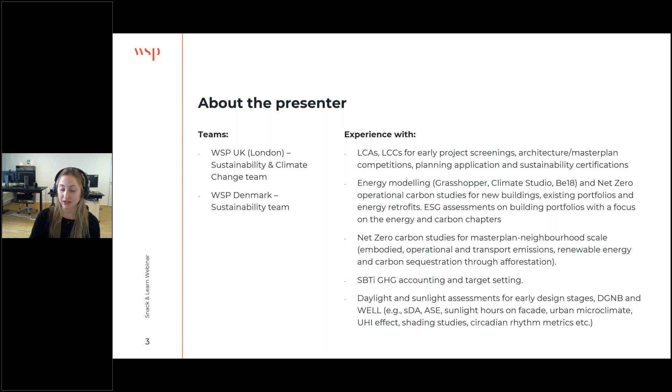Moving on to the project. Today, I will try to give you an overview of how we work to reduce the carbon footprint of a mixed-use building by more than 50%. The design for this building took place as an architecture competition entry for a new office and mixed-use building in Oslo, in Norway. And this happened in collaboration with Schmidt Hammer Lassen architects. As a design team, we reached only place number 2, but nevertheless, we learned a lot along the design process, and this is what we came to share with you today.

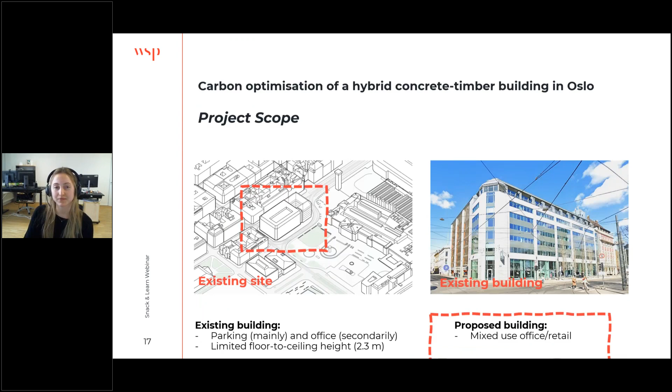So we will start with an overview of the design intentions and the sustainability targets, and then we will explain which design principles contributed the most to the project carbon reduction and go through them one by one, and then we will close with an overview of the final design proposals and lessons learned.

So the site, as you can see in this slide, is located in Norway, in Oslo, very close to the central train station. It currently comprises a parking building with some limited office areas on one side, on the front. The aim of the design is for the site to be redeveloped to an office building with also some large retail and some public areas, and also a small bus stop area on the ground floor. That was the brief. And the competition brief also includes demolishing the existing building and designing a new one in its place, because there is a very low floor-to-ceiling height on the existing parking building. It was about 2.3 meters. So it was not very appropriate for the character of the new design.

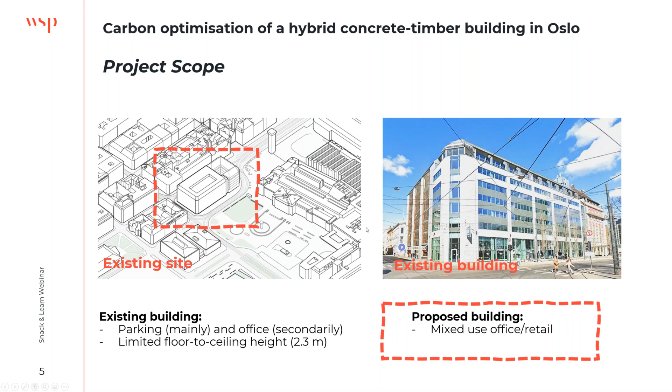The new office building is aspired to comply with the Norwegian FutureBuilt requirements. This is a sustainability scheme, and it generally requires new buildings to achieve very low whole life carbon emissions, incorporate at least 50% reused and reusable components, and achieve a significant increase in local biodiversity, among a few other criteria. When it comes to its carbon performance, the new buildings are aspired to perform 50% better than the current practice in the industry, while simultaneously looking 10 years ahead into the future.

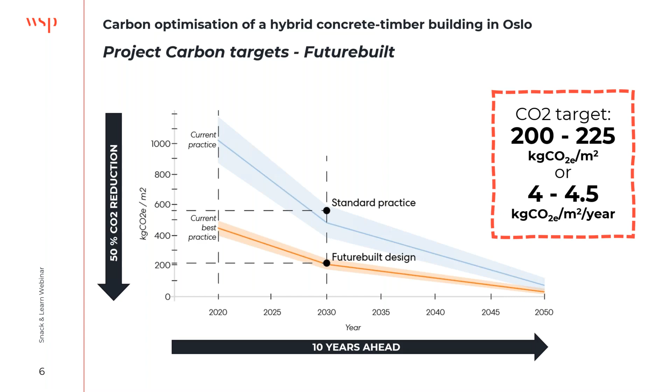And this means that the carbon target for our design was a bit less than 225 kilos of CO2 per square meter, or for the Danish audience today, the equivalent of less than 4.5 kilos of CO2 per square meter per year. This is the primary carbon metric in Denmark. In WSP, we always seek to align our designs and advice with sustainable development goals. And for this project, alignment was pursued with goal 3, good health and well-being, 9, industry innovation and infrastructure, and 12, responsible consumption and production.

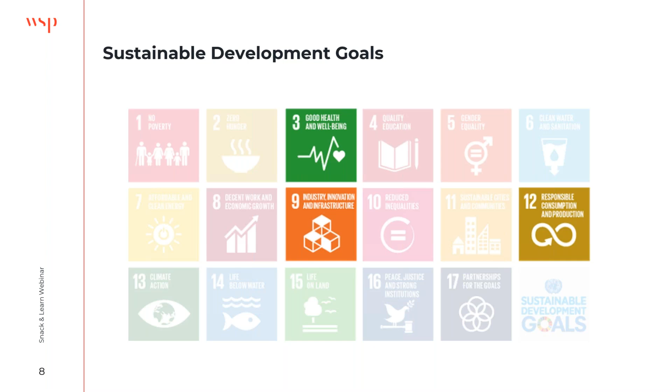So, in the early stages of the design process, we collaborated closely with the architects to understand, first of all, which are the broader design initiatives which have the largest potential to cut down on carbon for this project. The first possibility that we decided to explore was whether it is possible to reuse any of the precast concrete structural elements from the existing parking building before it becomes decommissioned. And these elements, we were thinking if we can use them for the construction of the new basement areas, which are required anyway by the competition brief. They were quite extensive and therefore potential carbon hotspots if we didn't include a solution for them.

And then moving on our considerations from the substructure to the superstructure, we look for ways to minimize, to reduce the required quantities of the structural materials. And that's why we decided to include some early computational design analysis on some different structural grid scenarios. We will go through them later.

And then we also explored various structural systems, concrete, timber, or hybrid. And we wanted to understand which of them could be efficient when it comes to resource use. The next design opportunity that we dived into was including timber in the structural and architectural design.

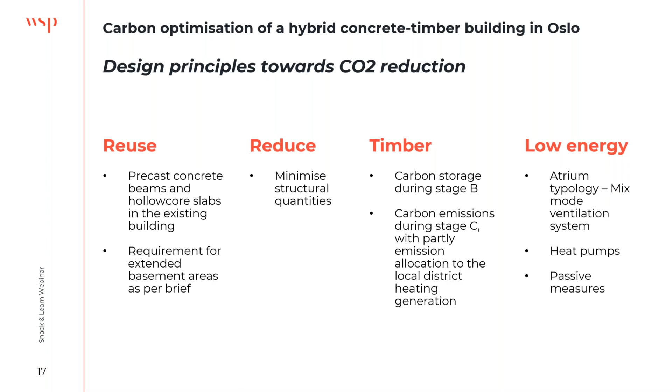Starting from the reuse. The existing multi-story parking garage, as we said, is constructed from long-span precast concrete elements, which provide the opportunity for reuse of the structural components, and they have been considered to be reused specifically as part of the proposed basement level floor structures.

Circularity of structural elements in this way is not very new, and there is a precedent in Oslo. There was this development, Kristian Augusts gate 13, which is Norway's first building where the reuse of building materials and circular solutions has been used on a larger scale. So by considering such a solution, it is estimated that we are saving approximately 90% of the embodied carbon in comparison to a standard construction of concrete floor slabs, not accounting for foundations or retaining walls, just the slabs.

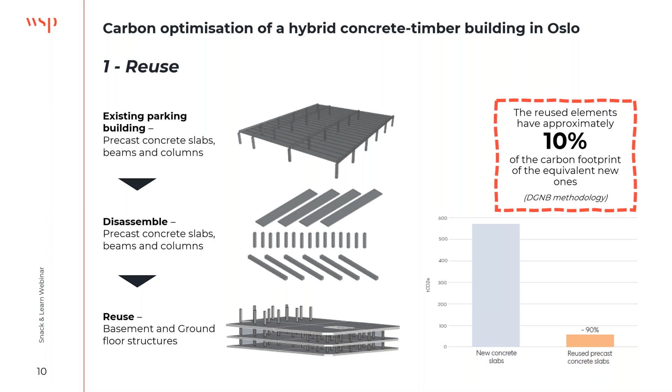And then the widest one was a 6 by 12 meter grid, with only 2 rows of columns, but the beams bridging the long span are timber. And the rest of the options that we tested lie in between. So the results of this analysis showed that for this building geometry, we were going for an atrium typology, so not an especially long building.

It is more efficient with the narrower and leaner grids, the 6 by 6 or something equivalent. And the long span hybrid timber solution, while providing the benefit of a clear open floor plate, would increase the embodied carbon content by approximately 20%.

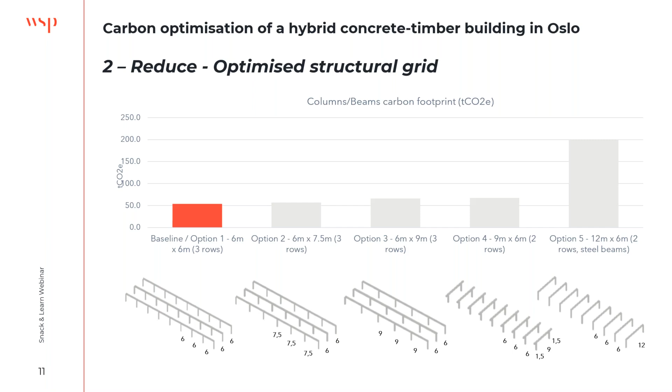And then as the design moved further and we specified the structure, we moved to another method to reduce the material quantity. And this was to adopt the modular CREE system. So this consists of hybrid timber and concrete floors, which are supported by steel beams here internally and timber posts along the facade. There's a concrete topping to the timber floors, which provides additional mass and improves the acoustic and fire performance between the floors.

The proposed arrangement is based on a 7.5 to 7.2 grid, and then this is divided by 3. And yeah, so this suits the proposed 2.5 planning grids and still offers a pretty flexible open plan arrangement. The proposed system was selected also because of its carbon and structural efficiency, but also because it responded to this high quality design intent with crafted detailing of all of the exposed details.

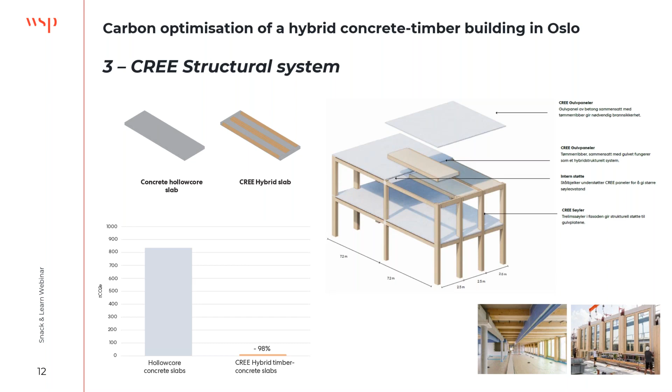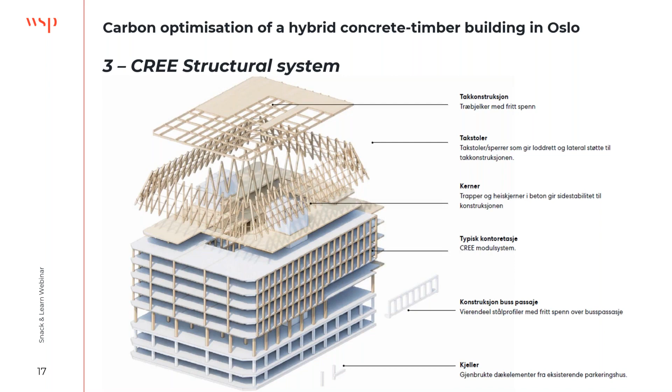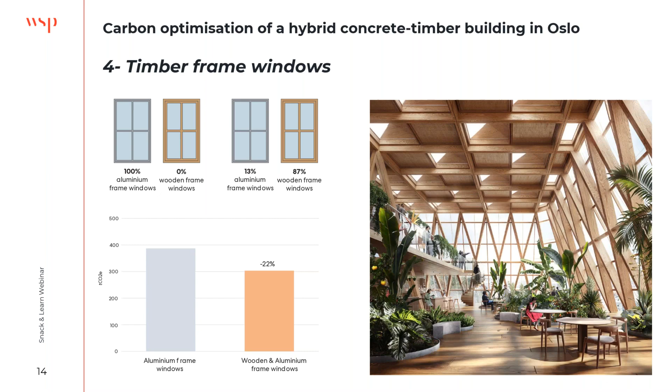And finally, the last layer of the proposed low carbon building design aims to achieve a low energy performance. The proposed passive design measures include using the thermal mass provided by the concrete layer of the slabs, and this has been combined with a geothermal heat pump based system for heating, cooling, and ventilation. There is some heat recovery, which takes place during winter at the top of the atrium where the warm air naturally rises, and then during summer, as you can see on the right, the openable windows on the rooftop with integrated shading help to mitigate overheating naturally.

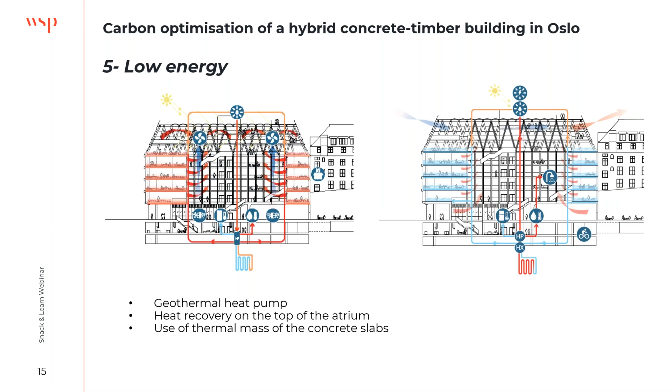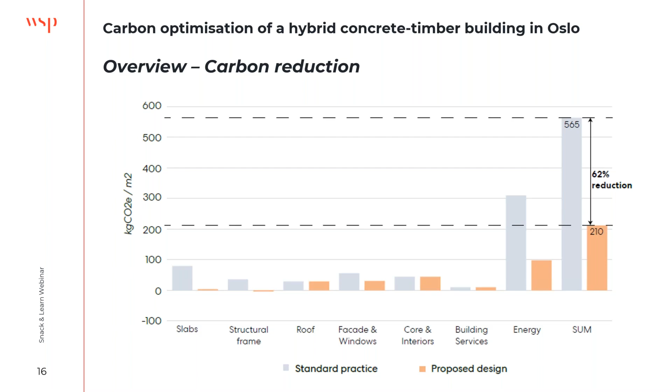Overall, the carbon footprint of the proposed design was reduced according to the Norwegian LCA methodology to approximately 210 kilos of CO2 per square meter, which is a reduction of approximately 62% when compared to standard practice. And therefore, the design actually achieved compliance with the FutureBuilt carbon requirements. Wrapping up with some views of the proposed design, you can see the CREE system, the 2.5 grid, the glulam beams for the roof, the concrete floor slabs, and some facade materialities.

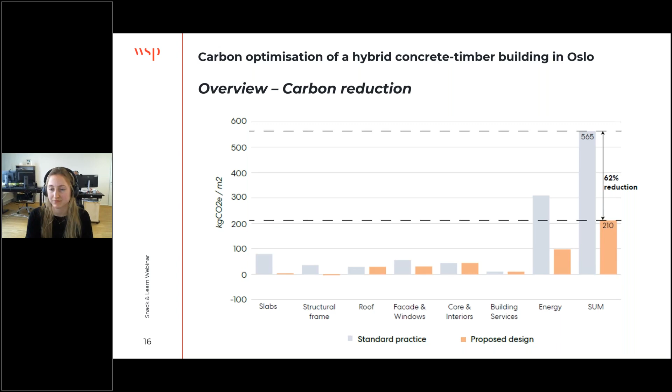Thank you. What other options did you explore, and what criteria did the client use to choose the concrete timber solution? The other solutions that we explored were the standard hollow core slabs and precast beams and columns. The second one was all CLT and glulam, and the third one was the hybrid. And because it was a design for a competition, we only discussed with the client the last option, the one that we had actually chosen, the hybrid, the CREE system.

Thank you. How do you ensure that the client or the customer accepts a low carbon solution which includes recycled and reused components? In this particular case, it was part of the competition brief that we comply with the FutureBuilt requirements, and this already includes having a very low carbon footprint. And actually, there is a requirement to use reused and reusable materials as per this FutureBuilt scheme. So the client already wanted or was open to exploring solutions in this area.

Thank you. Why do the timber concrete slabs represent such a lower embodied carbon than traditional hollow core concrete slabs? It's because there is less material quantity. This slab that you can see is actually very thin because it has those beams around it. It's very narrow and long, and of the beams, in one direction it's concrete, and the other one is glulam. And the panel that goes on top has a very small width. So the material used is less than a hollow core slab. And also because it has timber as part of it, it gets a minus. This is how it gets so low.